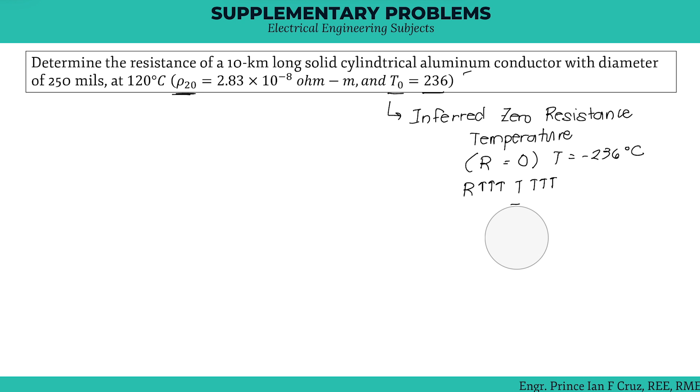This value is a constant for each material. So every material such as copper, silver, may kanya-kanya po silang inferred zero resistance temperature. Ginagamit po ito when converting resistance or even the resistivity, so R or rho, from one temperature to another. So ano yung magiging resistance at 20 degrees Celsius, then gusto mo siya i-convert to resistance at another temperature, ginagamit po natin itong inferred zero resistance temperature.

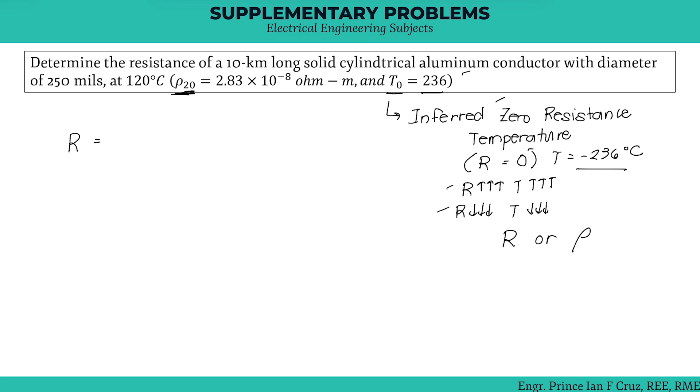Okay, so given po tayo ng resistivity of aluminum. 20 yung ating subscript, meaning this resistivity value is only valid at 20 degrees Celsius. So remember natin na the resistance or resistivity varies with temperature. So kung gagamitin natin yung basic formula ng ating resistance na R is equal to rho L over A, dahil yung gagamitin nating resistivity is at 20 degrees, at 20 degrees din yung makukuha nating resistance.

Okay, then after that, we want to convert the computed resistance at 20 degrees Celsius to 120 degrees. And dito na po papasok si inferred zero resistance temperature. Ito kasi yung formula natin, yung ating temperature resistance relation. So ito yung initial temperature, initial resistance. Ito yung final resistance, final temperature. So take note, this is alpha, another constant siya. And it must correspond to T1.

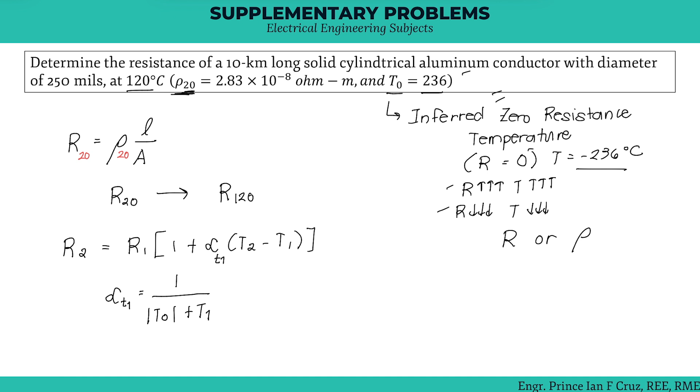Okay, so let's substitute everything na. So L over A. So ano bang target natin na unit ni resistance? Dapat ohms, so dapat makancel tong meters. And makakancel yung meters kung yung unit ng L natin is meters and yung unit ng ating area is meter squared. So ohms yung matitira. So target natin dapat meters and meters squared.

So let's start with the length. Yung length natin is 10 kilometers, or gawin natin siyang 10,000 meters. Then yung area natin. Ano ba ang area ng circle? Pi over 4 d squared. Then yung ating diameter is naka-mils, so we have to undergo several conversions. Mag-start tayo sa mils to inches: 1,000 mils to 1 inch. Then 1 inch is equal to 2.54 cm. Then 100 cm to 1 meter. Yun po yung gamitin natin para maging meter squared yung ating area.

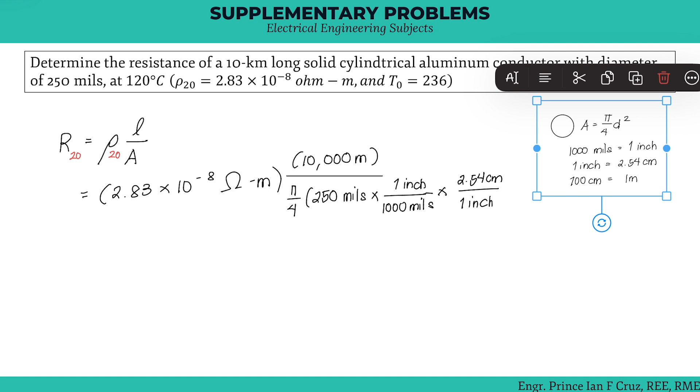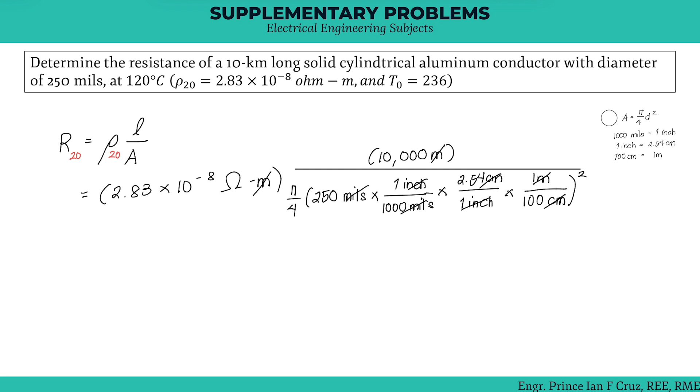Okay, so magka-cancel na lahat ng units natin. So ang matitira na lang is ohms. Okay, so yung answer natin is 8.94 ohms. So ito yung resistance lang for 20 degrees. I-convert naman po natin siya to 120 degrees using this formula. Okay, so ito yung R1 natin, ito yung ating R2.

Okay, then yung temperature natin is from 20 to 120. So dapat dito aakma yung ating alpha, so dapat ito ay alpha sub 20. Kung yan ay alpha sub 20, dapat 20 yung nandito. And our inferred zero resistance temperature is given na 236. So let's compute muna the alpha. Ang unit niya is degree Celsius raised to negative 1, kasi nandito yung degree Celsius sa ilalim.

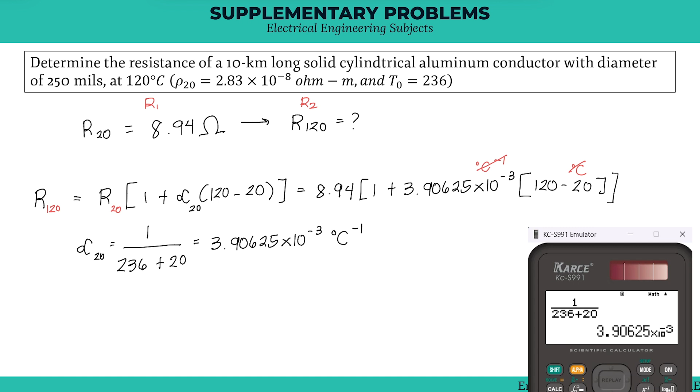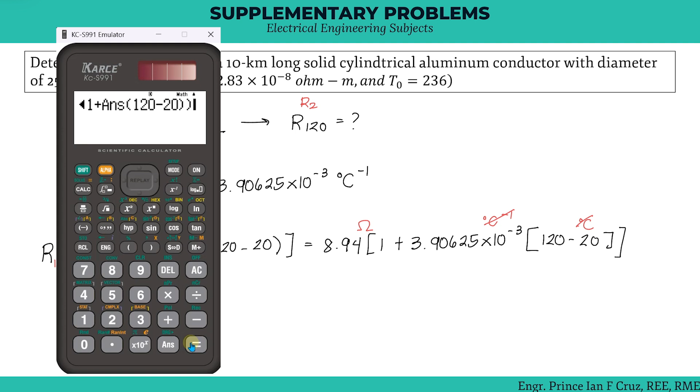Substitute lang natin dito. Okay, so magka-cancel yung unit kasi ito degree Celsius, ito degree Celsius raised to negative 1. So ohms po ang matitira kasi may unit na ohms yung nasa labas ng ating factor. So yung R120 natin is 12.43 ohms. Okay, so ito po yung ating answer.